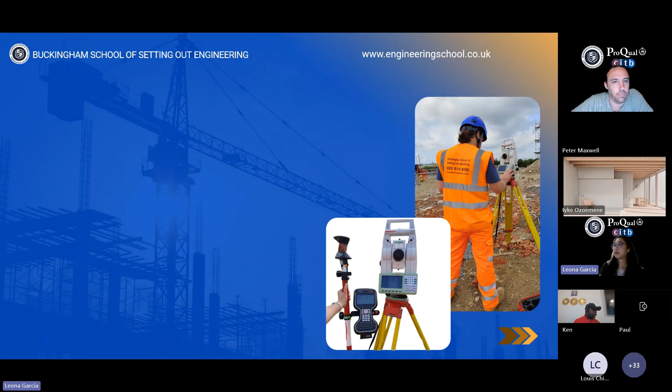Now that we've seen how satellites help us position ourselves quickly, let's move on to the instrument that takes precision even to the higher level, so to speak. That will be total station. With that, I'll be passing the floor on to Ken to tell us more about the total station. Ken?

Hello, hello, hello, hello. Good evening, everyone. Right, my name is Ken, and probably a lot of people may have known, seen, heard about me. We have been given very short time in this presentation. I usually like taking longer time, but I've been restricted. They want me to mind my time. Thank you for making time to be with us tonight.

Engineering in the UK is almost surrounded by the use of equipment, which you are not going to be far from in terms of what they are used for. All over the world, there are constructions going on daily basis. In fact, in the UK, you have the roads, the rail, the water pipes, the utilities, underground services, gas pipes, electrical cables both underground and overground. So as an engineer, or a potential engineer, or someone who has the zeal, the passion to join engineering in the UK, the use of equipment known as total station is key.

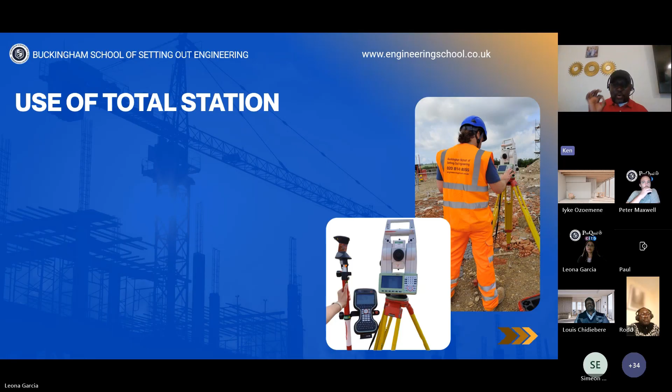For example, you have a building - of course most buildings in the world have 4 corners: 1, 2, 3, 4. Those 4 corners have their named coordinates, positions, X, Y, Z. That coordinate is something we're going to start from scratch to educate, to let you know what it means, how to work it out, how this coordinate works.

When Peter was speaking, he talked about GPS, Global Positioning System, where you can stand and we'll be able to understand where you are. So this total station is used to measure both angles and distances.

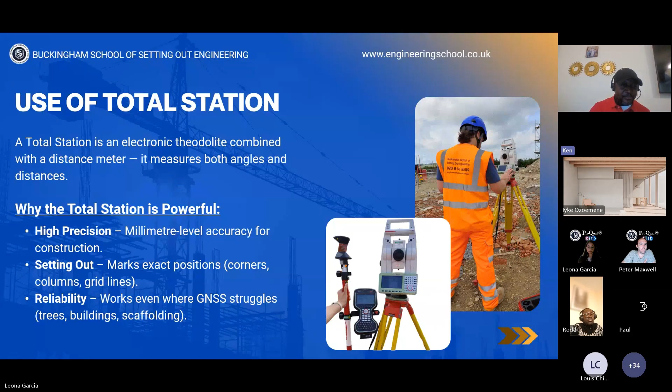Next slide please. So the high precision reduces to millimeters when this equipment is measuring these angles and distances to be able to determine the positions - I mean positions in terms of setting out position and also in terms of the levels. Almost every site in the UK, you're not able to carry out construction without this equipment. I'm going to show you practically how they look, apart from what you're seeing here. What you're seeing in the drawing is almost exactly what we have here physically.

So what the total station does is measure both, rotating this way - I don't know if you can see it very well - it rotates in horizontal system and also in vertical. It's made in Switzerland.

These people try to upgrade, to update, to maintain on a yearly basis, just like your iPhone 12, iPhone 14 - I think now they have iPhone 17, probably getting to 23 - but iPhone is iPhone. So what this piece of equipment is doing is giving you reliability, giving precision.

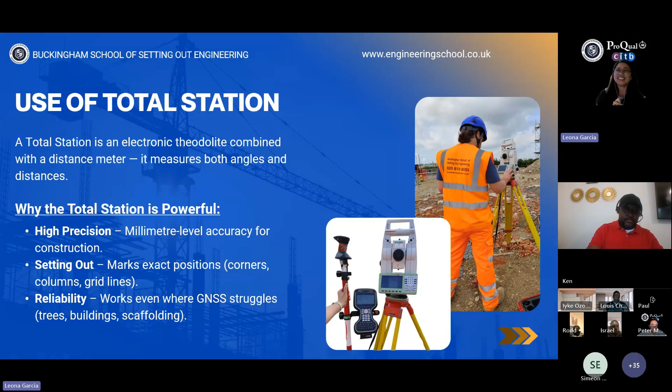So let's have a quick pop quiz. Nothing serious, just a quick question and answer. Just prepared a couple of questions. Feel free to drop your questions in the chat and let's just see who was paying attention in the past 20 minutes. So the first question I have for you is, what affects GNSS accuracy the most?

Is it A, trees or buildings? B, is it the weather? Or C, is it the time of day? So go ahead and

Type in your answers. We've got that written. Okay, thank you, they're coming in. Wow, I'm seeing A, weather, trees, building, A. Anyone else who would like to put in their answers? Come on, don't be shy. Come on, okay, I'm seeing questions. We'll answer the questions in a bit during our question and answer portion.

Okay, I'm seeing a lot of A's. So what do you think it is? Then the answer is A, trees and or buildings. Well done for those who answered A.

Okay, I have another question. Next question is, what's my next question? A total station can measure what? Oh, that was just the previous slide. Can it measure only distances, B, only angles, or C, both distances and angles?

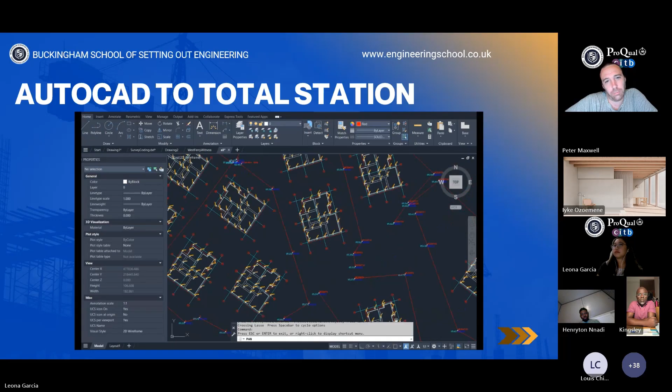This is a quick live simulation. So on here, we've got a site in AutoCAD, you can see several buildings. This is actually our Buckingham School of Engineering site that if you're on our course, you'll be using this data. We can bring this onto our equipment, which the video should show you shortly. Just having a look around the site, as you can see, all the grid systems, the whole building, that's all loaded in there.

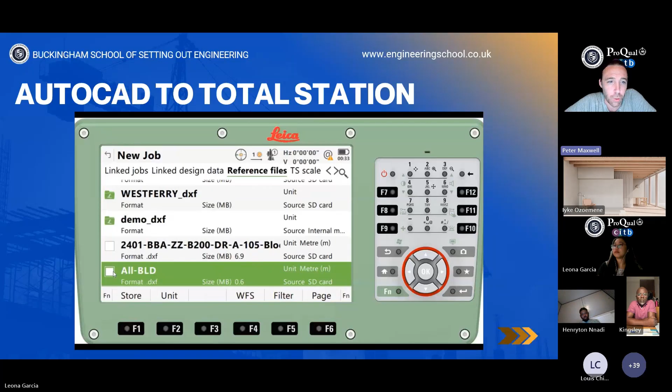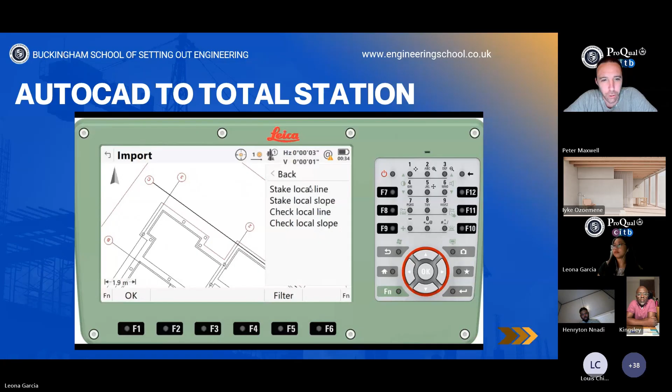We're looking at a Captivate like a TS16 instrument. We're creating a job, and then attaching that drawing to our job. Now the whole site's been imported to our controller, which the video will show you shortly. As you can see, the exact model we had in AutoCAD has been imported onto our equipment, now ready to use on site, which is something we cover over and over again in our setting out course, so you feel like you're able to do any job, get sent any drawing, and be able to set that out.

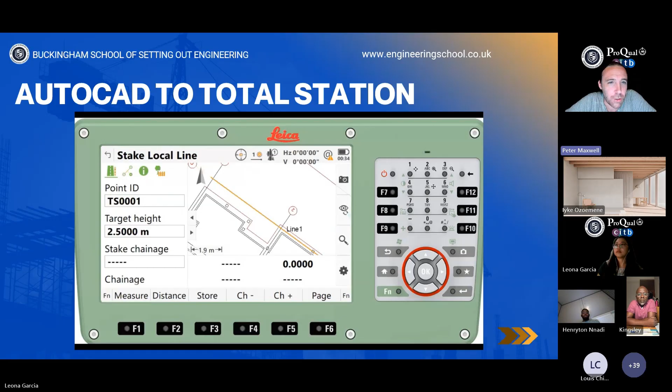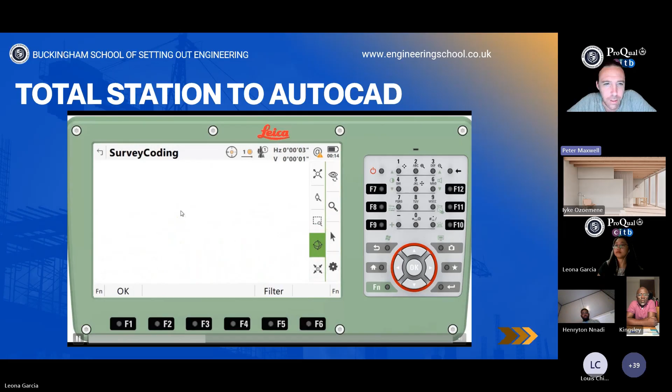Equally, now the video shows the reverse. So now we've been measuring what's on site, and we need to take that back into AutoCAD, which it should show you. Here we go. So here we've been measuring what's on site, you can see some fences, a road, and a pond, which shows you how powerful the system is. We can view the whole site in 3D, it's a very, very useful tool.

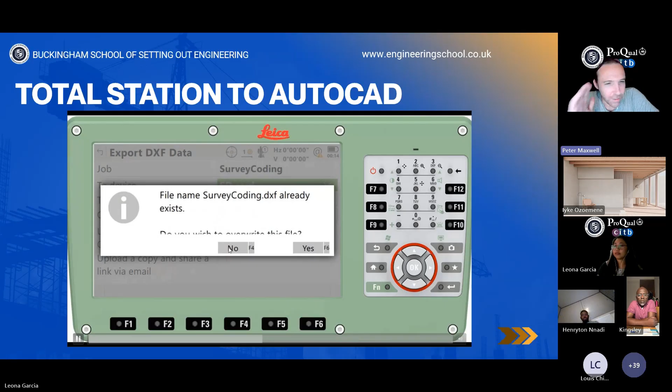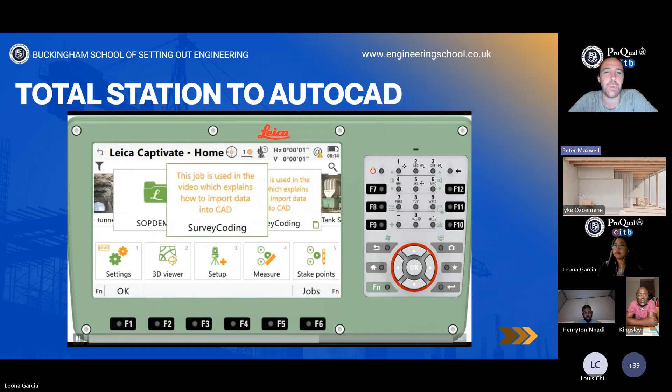You might imagine engineering is all high-level maths, very complicated, but this equipment really makes it, I don't want to say easy, but a lot easier. We don't have to calculate anything, the instrument's doing it all for us. Now we've exported it, and this is seeing the reverse, we've imported what we measured on site back into AutoCAD, where you can see it. On a real site, we'd go measure with our GPS or total station, export it into AutoCAD like this, and then send that to our design team or site manager. Yeah, that's pretty much it.

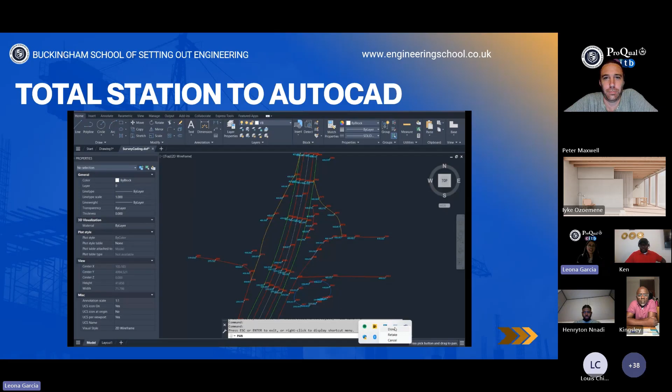Thank you so much, Peter. Wow, that was quick. I didn't realize we're almost ending the session. Time flies by so quickly when you're talking about interesting things, isn't it?